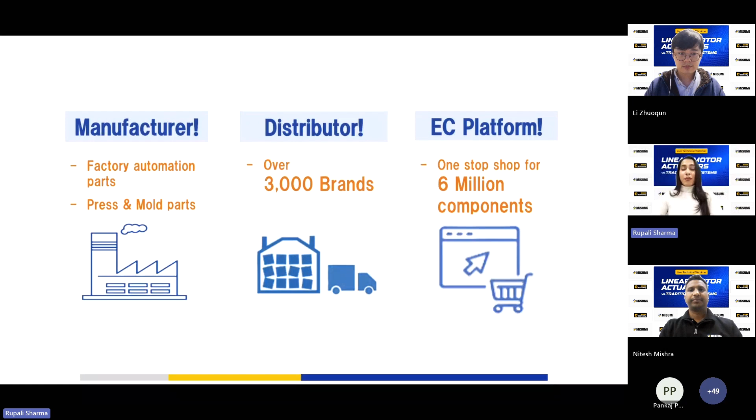MISUMI has a pan-India presence with 5 sales offices and 3 warehouses catering to major industrial hubs. We have sales offices in Pune, Ahmedabad, Gurgaon, Chennai, and Bangalore, with 3 warehouses in Pune, Bangalore, and Gurgaon.

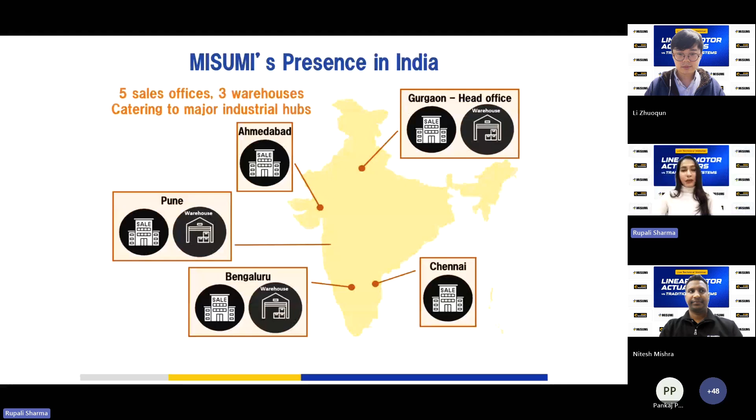Coming to today's webinar agenda: we will be talking about our star product, the Linear Motor Actuator. We'll be giving you an introduction to the Linear Motor Actuator, followed by comparisons with traditional systems, key applications of LMAC, and pricing related queries. At the end, we'll have a Q&A session where you can ask all your questions, and our technical experts will be answering them.

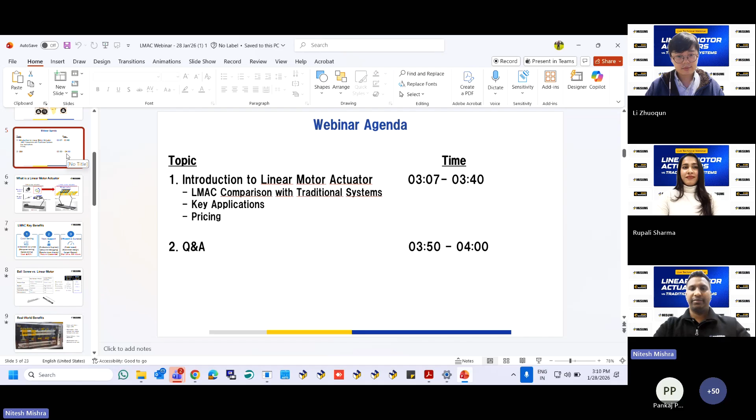Hello, everyone. Thank you, Rupali-san. Rupali-san has already cleared today's webinar agenda. Let me introduce myself first. My name is Nitesh Kumar Mishra, and I'm working as an application and solution expert. Today I will explain what a linear motor actuator is, and its comparison with the conventional type ball screw actuator.

So what is the linear motor actuator? On the left side, we can see the ball screw actuator. On the right side, we can see the linear motor actuator. Here we have shown the difference between the ball screw and the linear motor actuator.

In the ball screw actuator, the servo motor converts rotary motion into linear motion through the ball screw. On the right side, the linear motor actuator converts direct linear motion with the help of electromagnetic force, or in an easy way, the repulsive action between two magnets creates linear motion. We can also understand this through the video.

Here we can see the servo motor converting rotary motion into linear motion with a ball screw along with reciprocating ball bearings. On the other side, the slider is sliding over the stator, which consists of a permanent magnet, and the slider has an iron core which works as a magnet motor.

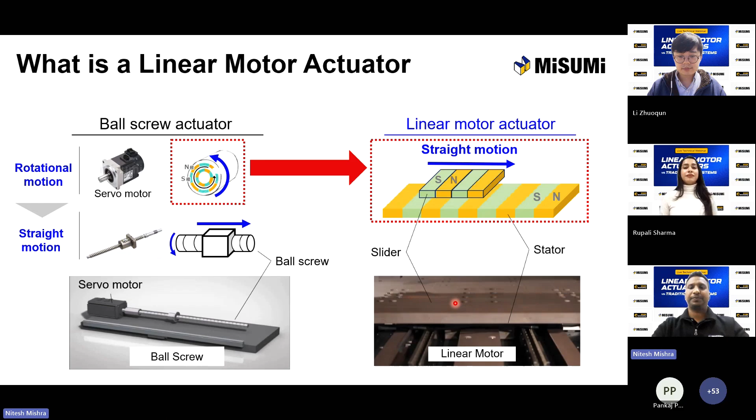Coming to the linear motor actuator key benefits, the first is cost saving. The linear motor actuator has unbeatable low prices, saving manpower costs and also saving space. In terms of space, we are not using an external motor, so from space constraints it's also compact.

The third point is efficient and durable. The linear motor actuator is able to achieve faster speed, is designed with multiple sliders, and has a longer lifespan. Here we can see the maximum speed is 2 meters per second and the lifespan is 50,000 hours.

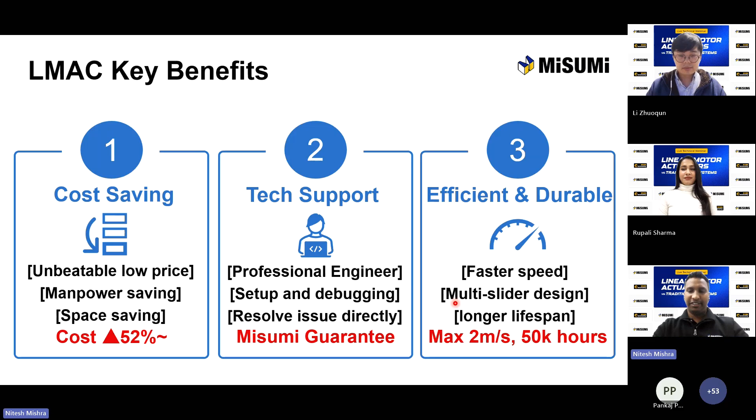In the last slide we saw the slider and the stator. They were moving frictionless, with no mechanical arrangement for their motion, so there is less wear and tear. So we are getting faster speed and a longer lifespan. This way we can understand the benefits of the linear motor actuator over the ball screw.

So what is the motion type involved in the ball screw and the linear motor actuator? Here we can see rotary motion along with mechanical conversion. In the linear motor actuator, it's direct linear motion. The speed of the linear motor actuator is high, with high precision, and mechanical wear is very low, requiring very little maintenance.

In terms of stroke, the linear motor actuator can achieve a maximum stroke of 3.8 meters, and the speed can reach 2 meters per second. For position repeatability, we get plus minus 5 micron. Even for precise applications, we can achieve plus minus 3 micron with the help of an optical type scale. And the lifetime is 50,000 hours.

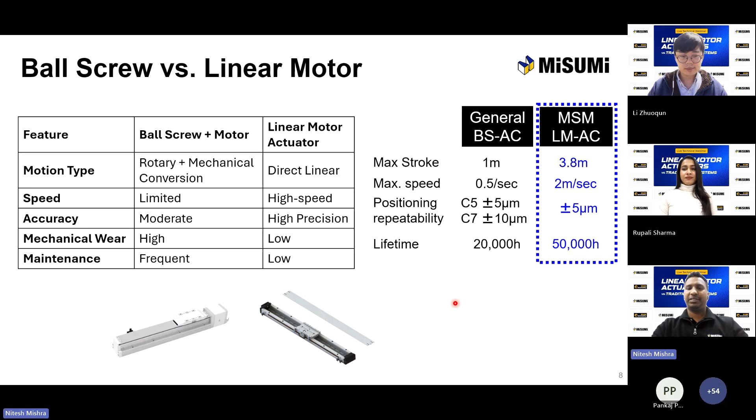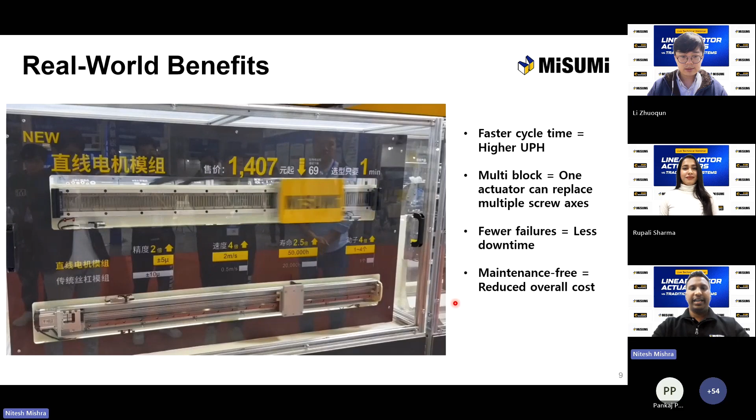So this is the real world benefits, and through the video we will understand. In the above video, we can see the slider moving with the motor, and the lower one is the ball screw actuator. We can compare the speed and the additional benefits of having the linear motor actuator.

Faster cycle time, multiple blocks—one actuator can replace multiple screw axis, fewer failures, so reducing the downtime. It's maintenance free and reduces the overall cost.

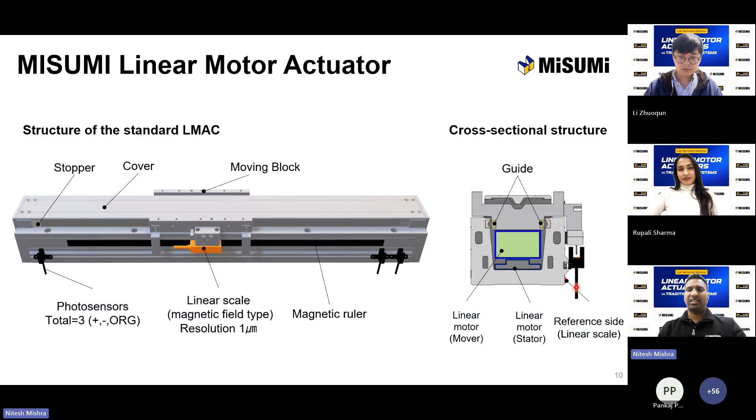If we take a simple example, if we are using this linear motor actuator in an industry where there are possibilities of foreign particles or objects entering the actuator, we can prevent this scenario by using the cover type of actuator.

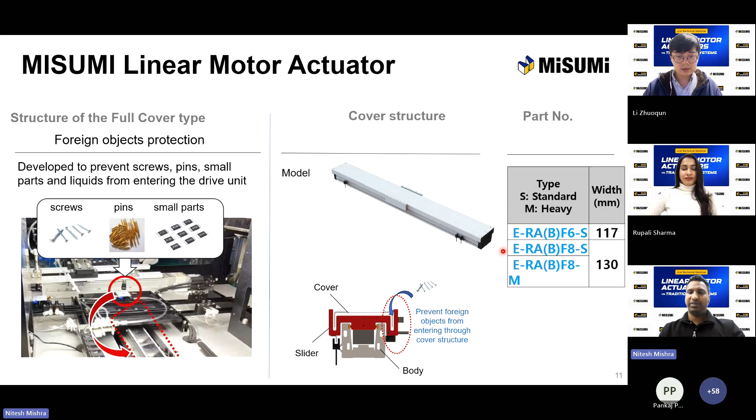On the right side, we can see the nomenclature of the part code mentioned here. We also have a special order for the linear motor actuator. First, the maximum stroke available is up to 3780 millimeters. We also have the black anodizing body. Third, the optical type linear scale, whose position repeatability can go up to plus minus 3 micron. And grease specification change - low dust generation grease, AFF series. We also have the absolute encoder type, BC type, which is compatible with the MISUMI driver.

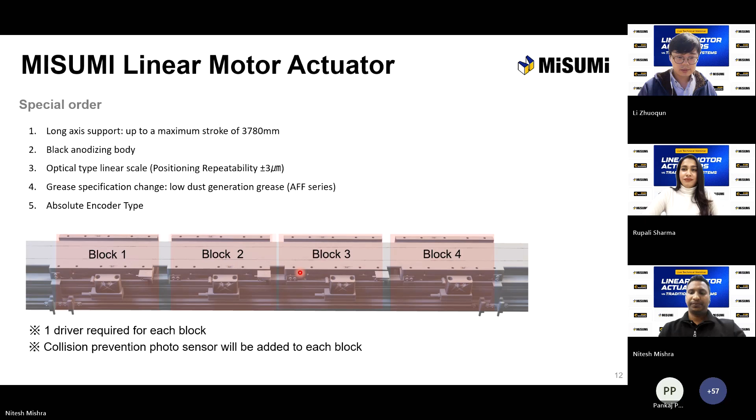Actually, we are not going to do any electrical or mechanical calculation for the selection of the linear motor actuator. So what are the parameters and how do we use them? First, enter the installation method - how we are going to use it: horizontal, single axis gantry, or wall mounting gantry, just like this. Second, enter the usage conditions - the load and speed. Third, the stroke designation - how much stroke or length we want to travel, the travel length required in the application.

We can also select the encoder cable or motor cable - customization is available up to 1 meter, 3 meter, 5 meter, based on customer usage. We can also add the number of blocks required in the application as per our requirement. Through this selection software tool, we can just get the part code of the linear motor actuator. We can get the complete product in a package, which reduces human effort, reduces manpower cost, and also saves time.

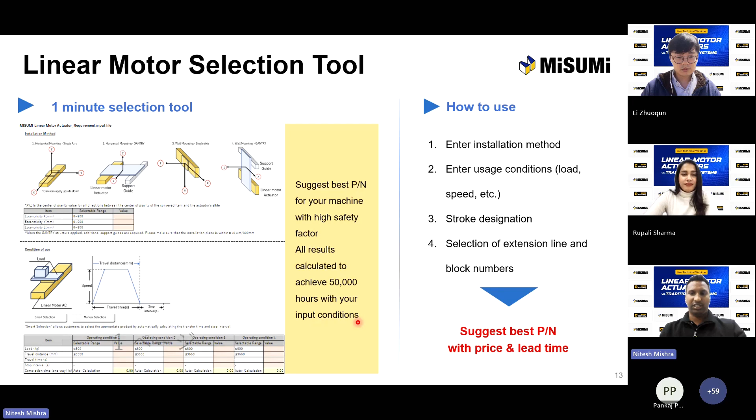We also have the IO configuration along with predefined path motion. On the other side, we have the MISUMI EtherCAT type. This is a field bus type communication, which reduces the cycle time and response time to get feedback to the customer. This one is the Servotronics, a high end, which is also EtherCAT type. And this is the Panasonic model, which also has the Pulse type and the EtherCAT type. All the MISUMI Servotronic and Panasonic series have auto tune support features.

We can also say there are other compatible drivers the customer needs to buy separately. As we know, most of the industry, most customers and users are using Mitsubishi type of driver, so for the Mitsubishi driver, we are also providing tech support. We are also providing parameter configuration for the motor data, and also supporting configuration of the driver along with the linear motor actuator.

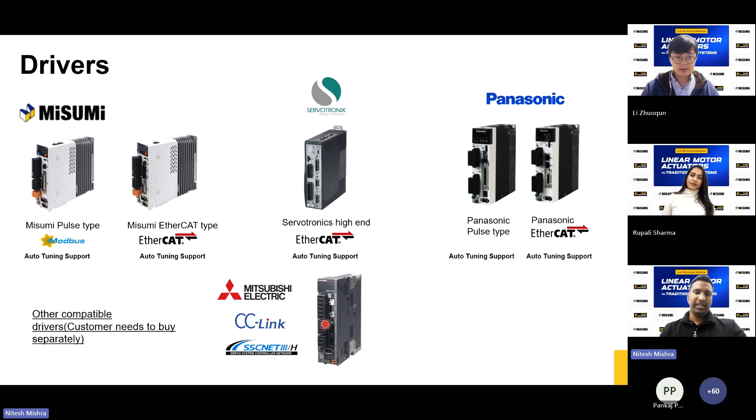So again, I will pass to Rupali-san to start the poll.

Okay, so just now Mishra-san helped to introduce some specs and the difference between the MISUMI linear motor actuator and the traditional ball screw actuator, and showed you some key benefits that this new product can bring to you. So now I would like to share some typical and interesting real applications that our customers are using in their projects, and maybe give you some more ideas about how the linear motor actuator can give you some real benefits in your project, in your application.

For example, here we have a project for the semiconductor industry as a pick and place plus inspection machine with a gantry system. You can see here we have a dual gantry system in one machine, and the pick and place and inspection use the flying trigger method. This design will help you increase the UPH. For example, two gantries working individually at the same time are able to double the machine's production efficiency. Also, when doing inspection with the flying trigger, there's no need to stop during inspection, which also saves time for the inspection process.

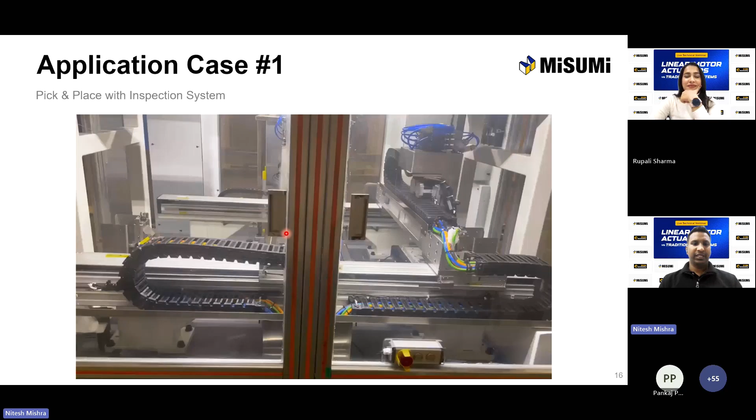Yeah, so this is the pick and place with the inspection system. Li-san has already given the explanation.

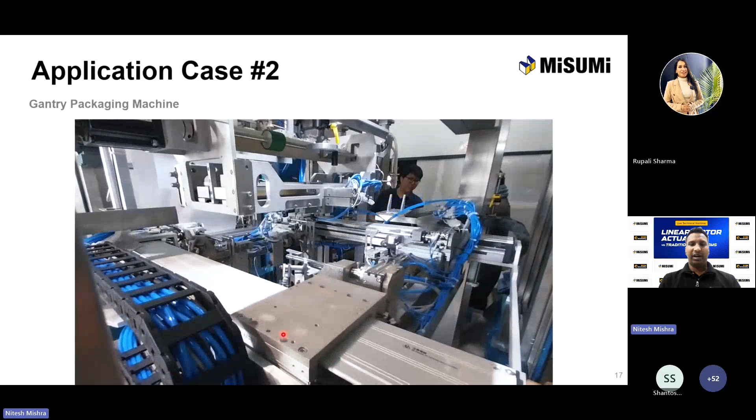Our driver has inbuilt features, the dual drive gantry synchronization. With the help of this, we are running this application where we are reducing the programming cost and the programming effort, using master and slave configuration.

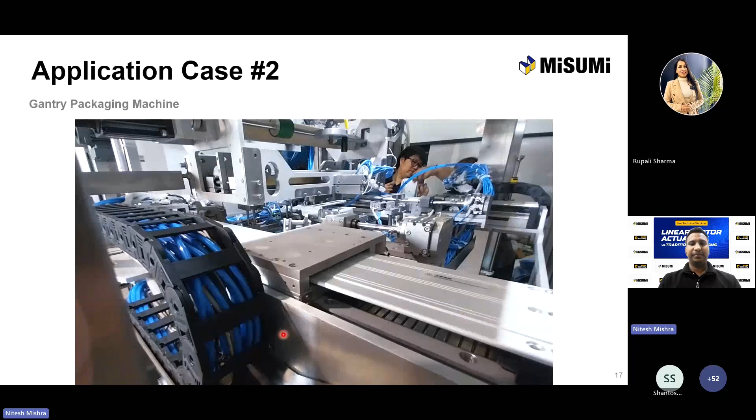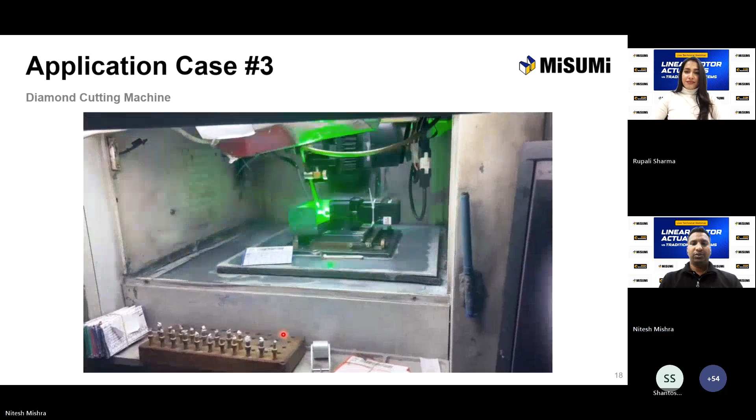This is application case 3, the diamond cutting machine, used by an Indian customer. Here we see a small movement where the customer is doing synchronization between the x-axis and the y-axis for the movement of the diamond, and with the help of the laser, they are doing this cutting. The customer is able to achieve ±3 micron.

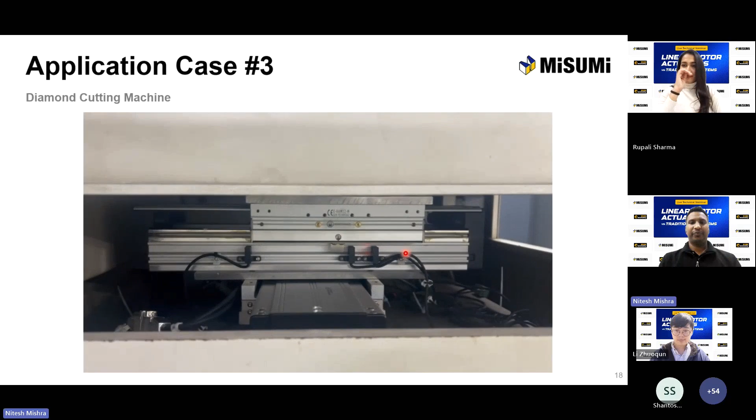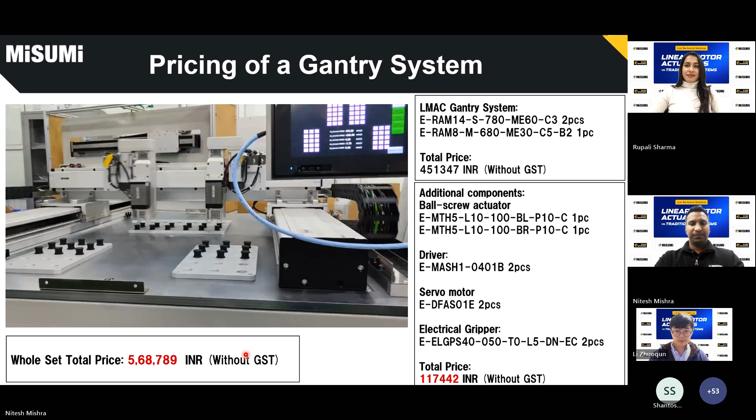Through this display we wanted to show that MISUMI is providing a complete solution when developing any application, like for the gantry or pick and place. We can clearly understand this through this screen.

Based upon this presentation, when we go for any selection of part code or product, generally we have some FAQs in mind. So we have selected some questions and I would like to answer them. This is the first question.

Is it possible to purchase only the main body, moving block, stator, and mounting base plate without the LMAC? For MISUMI Linear Motor Actuator, because we are selling a standard product, we do not currently have any plan to sell only the sliders, stators, or the body separately. But we do have accessories like the cable and encoder available as spare parts or replacements if something is broken or has a problem.

So here is the answer: we are not selling the moving blocks, stators, and mounting base plates separately. Customers can purchase the linear motor actuator only as a standard complete product.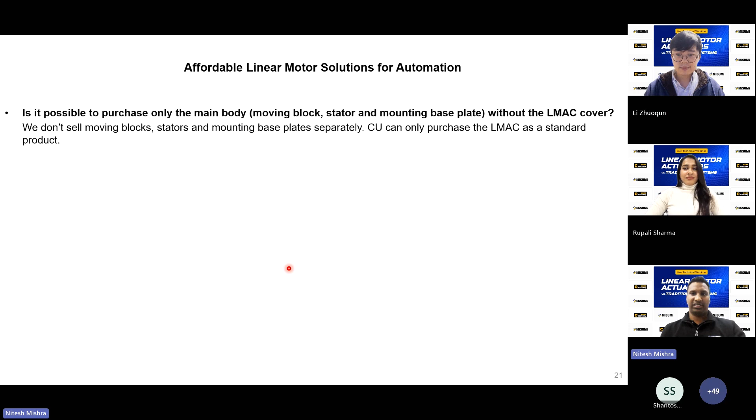Here is the second question: if I choose no driver, are power cables included? If we choose no driver, our part number will end with N-N, meaning no driver selected and no extension selected. If customers still want to purchase the MISUMI extension cable, they need to order it separately.

So here is the answer: if you select the product without a driver and the model number ends in N-N, then neither the encoder cable nor the power cable is included. You will need to purchase the cable separately.

Here is the third question: what is the maximum cable length available with MISUMI? On the linear motor actuator itself, we already have a lead wire whose length is around 20 millimeters. We will also provide an extension cable when you buy it together with the driver as a set, and the length of the extension cable can be chosen as 1 meter, 3 meters, 5 meters, 8 meters, or 10 meters.

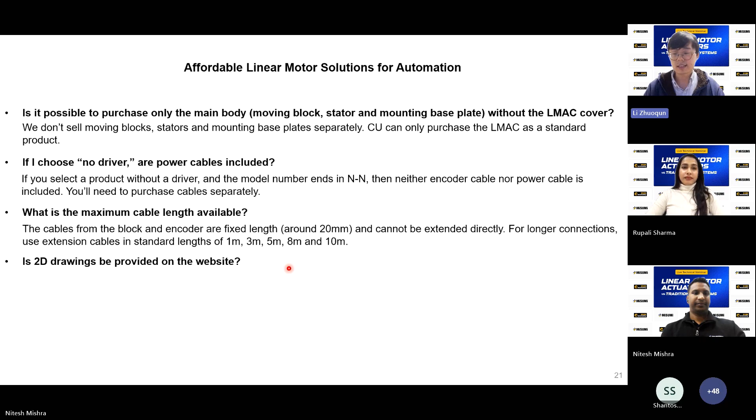Here is the answer given. Next question: are 2D drawings provided on the website? Yes, both 2D and 3D drawings are provided on the MISUMI website. Any customer can download them for free and use them as reference. If you are not able to download any drawings, please feel free to contact our technical team.

What is the difference between the standard S and the high load M type model? For MISUMI linear motor actuator, we have two versions for every part number: a standard version and a heavy load version. The biggest difference is the length of the slider—the heavy load slider is longer compared with the standard type. With a longer slider, we are able to support heavier payload. This is the main difference between these two part numbers.

Thank you so much, Lisan. With the help of these short questions, I think most things are clear regarding this product, the linear motor actuator.